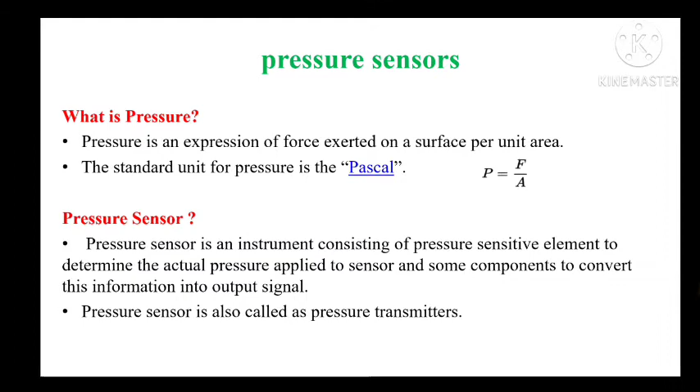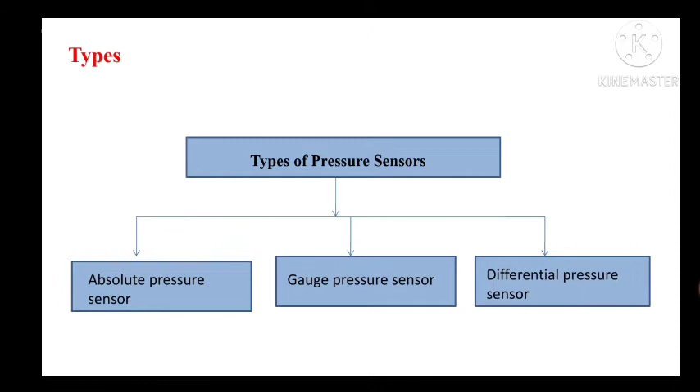This sensor is also called a pressure transmitter. Why are these pressure sensors called transmitters? Because they give the output as a 4 to 20 milliampere signal and 0 to 5 volt signal. Now types. There are mainly three types of pressure sensors: absolute pressure sensor, gauge pressure sensor and differential pressure sensor.

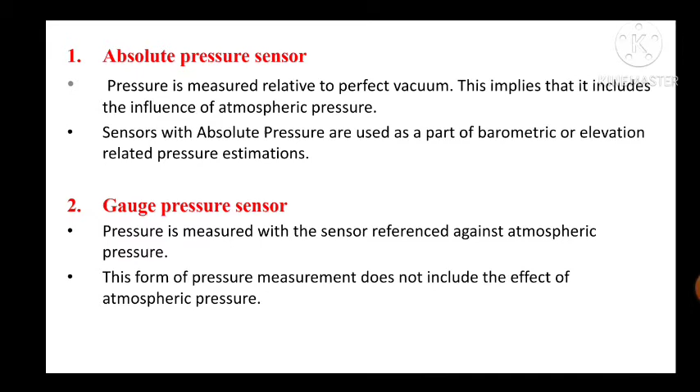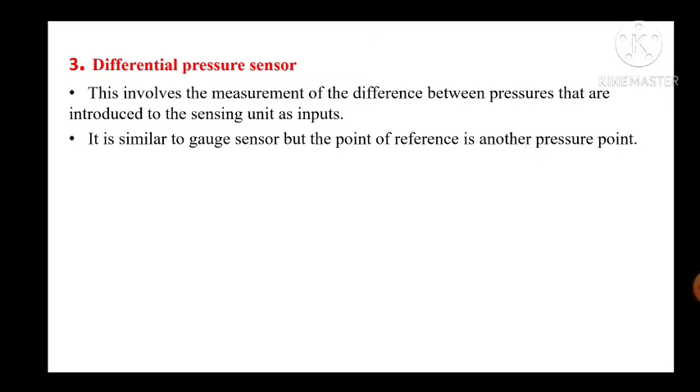First is the absolute pressure sensor. It measures pressure relative to a reference chamber or near vacuum. We can also say it measures the pressure relative to perfect vacuum, meaning it takes 0 as a reference point. Then gauge pressure sensors are used to measure the pressure relative to currently present atmospheric pressure. And differential pressure determines the difference between two pressures, and can be used to measure pressure drops, fluid level, flow rate and more.

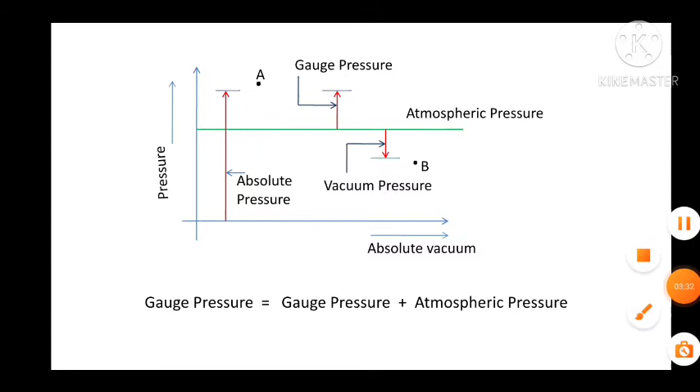To understand the difference between absolute pressure, gauge pressure and atmospheric pressure, we have a diagram. In this diagram, the x-axis indicates the absolute vacuum and the y-axis indicates the pressure, and this green line shows the atmospheric pressure. Absolute pressure is shown in red up to this point A. Absolute pressure is the pressure measured from absolute vacuum. Absolute vacuum means it has zero pressure. So absolute pressure is the pressure measured from the absolute vacuum.

The second one is the gauge pressure, which is above the atmospheric pressure. It is the pressure measured with a measuring instrument, starting from the zero reading, because atmospheric pressure indicates zero at the starting point. So it is above the atmospheric pressure. And then vacuum pressure, which is below the atmospheric pressure, meaning it is negative pressure. We cannot say this is absolute vacuum because it is not measured with respect to absolute vacuum. That's why it is only called vacuum pressure.

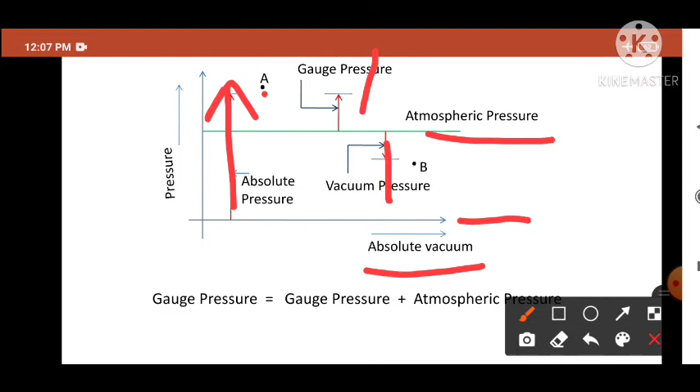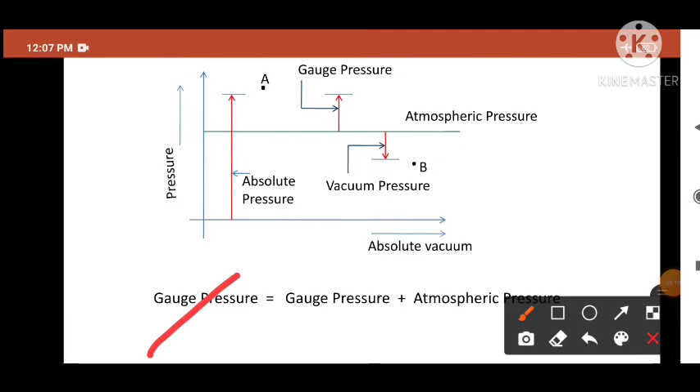Atmospheric pressure is the pressure of the surroundings, or pressure exerted by the air in the surroundings. From this diagram we can say that, sorry, I made one mistake. Instead of gauge pressure, this is absolute pressure. Absolute pressure is the addition of gauge pressure and atmospheric pressure. If you want to measure atmospheric pressure, then gauge pressure is subtracted from absolute pressure.

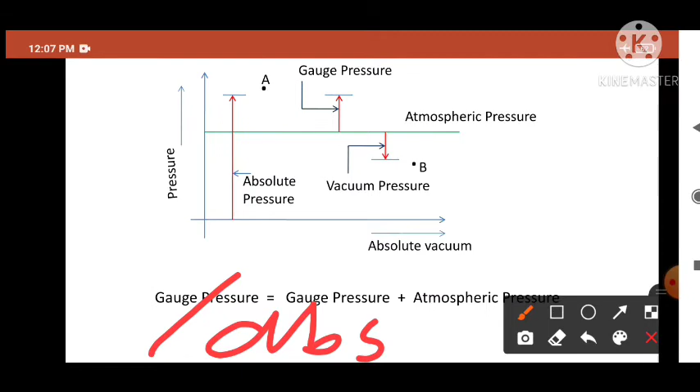Now the uses of pressure sensors. There are many uses and applications in day-to-day life. The first one is energy conservation. Accurate pressure measurement is very significant for energy conservation. These pressure sensors are widely used in weather stations, ocean research, water pollution and more.

Now touchscreen devices. As we all know, computer devices and advanced mobile phones with touchscreen displays include pressure sensors, meaning even slight application of pressure through a finger or stylus creates a signal, and these signals are detected by the processor. The sensor figures out where exactly the pressure has been applied on the screen, and accordingly gives the output to the processor.

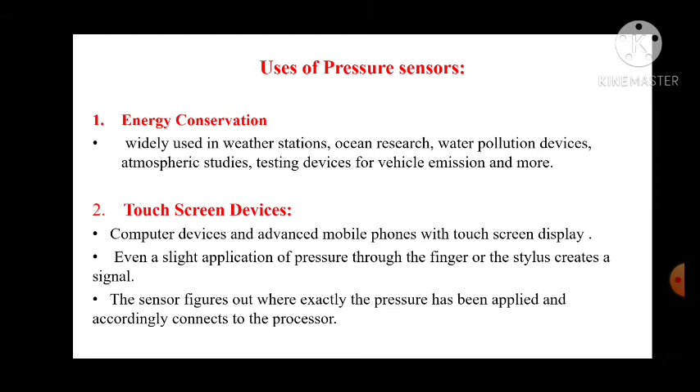The next one is the automotive industry. In this sector, pressure sensors form a critical part of the engine and ensure its safety. For example, in a motor, the sensor monitors the coolant pressure and the oil pressure. The sensor is also responsible for regulating the power when the brake is applied or the accelerator is used.

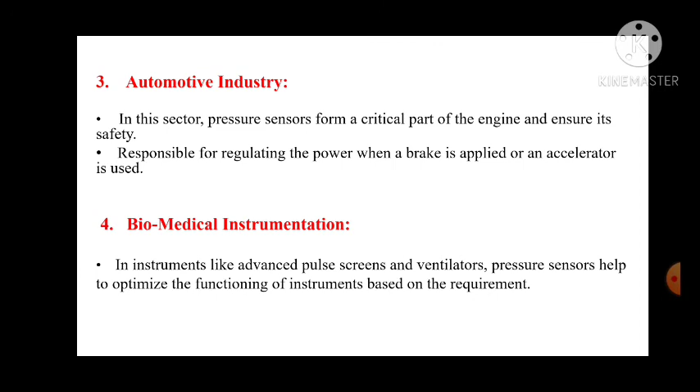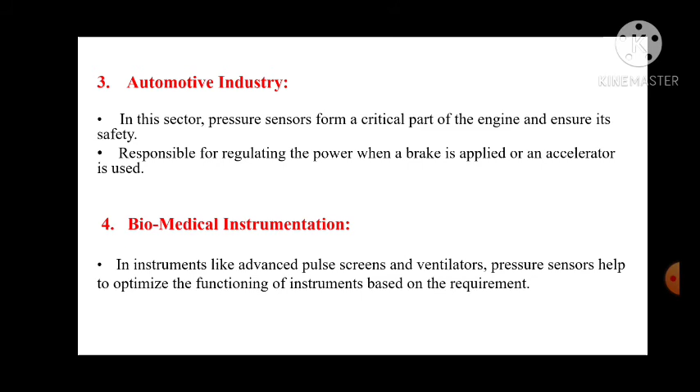Then in biomedical instrumentation, ECG screens, pulse screens, advanced pulse screens, and ventilators use pressure sensors, which help to optimize the functioning of the instrument based on requirements. Then aviation: in aeroplanes pressure sensors are used to maintain the balance between the control unit of the aeroplane and atmospheric pressure. This not only secures the hardware and different parts of the plane, but also helps give correct information about the outside conditions.

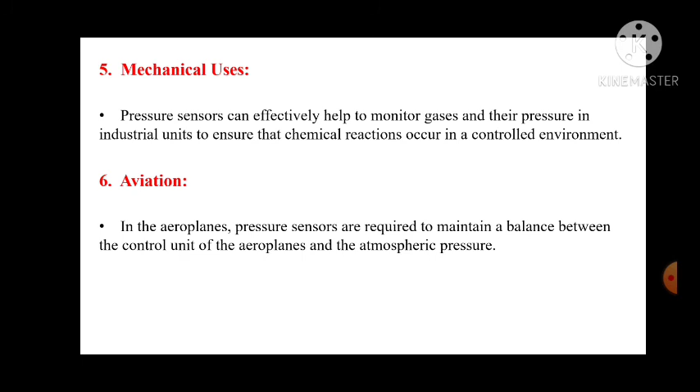Then the marine industry. In the marine industry, pressure sensors are required to find the depth at which ships and submarines are operating. So there are many applications of pressure sensors.